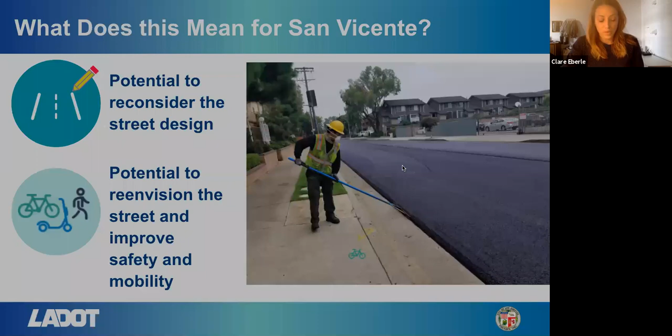The project area spans the corridor from the intersection of Fairfax and Olympic to La Brea. It's about 1.2 miles and connects and covers multiple neighborhoods, multiple residential pockets, and several commercial hubs along the way. It is heavily residential, so a lot of homes, many apartment buildings, and communities, but also full of community destinations, organizations, schools, and so forth.

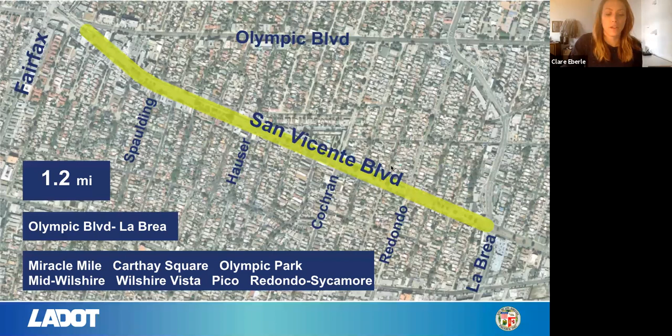We're interested in who's in the neighborhood and who may be using San Vicente and how. So within a half mile of the project corridor, 34% of residents are under 30, 19% of residents are students, 9% of households do not have their own vehicle available and are using other modes to get around. And 20% of people get to work by modes other than single occupancy vehicles. So that would include carpooling, transit, walking, biking, and other modes like motorcycle or rideshare.

So we know that people are getting around in different ways other than just vehicles, and some people who live in the area don't have access to a vehicle at all. This might not mean that they're necessarily biking everywhere, but it does mean that there's some other demands and interest in using the street in different ways.

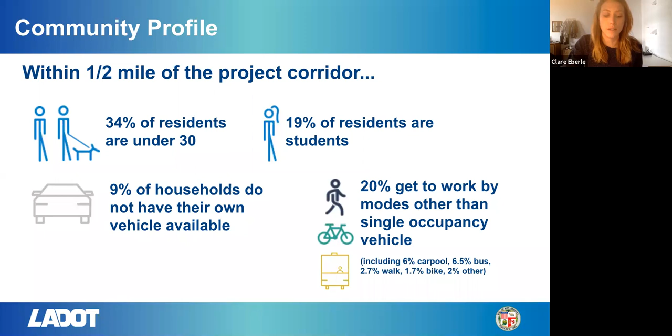So this is also a really exciting, vibrant neighborhood, and I'm sure if you're here today, you know it better than I do, but it's full of great places. A number of community groups are already doing the work of building place and community on streets around the project area. This is a great opportunity to connect to community assets and destinations that really fill the neighborhood.

And snapshotted here are some of those key community places. So Destination Pico, Little Ethiopia, and Destination Fairfax. The community streets that have been made into slow streets during COVID. And another really important change to the landscape is the future Purple Line stations at La Cienega, Fairfax, and La Brea.

There are also many schools, places of worship, and local organizations. So we're thinking about the presence of kids, families, and seniors and others moving around the neighborhood. And we've heard from a lot of people that they generally have an interest in creating a safer neighborhood because in part they may be taking their kids to school or may be interested in walking to some of these places that they go every day or every weekend.

In terms of the mobility context for San Vicente, what resources are here and what assets are here in terms of transportation? There's a lot going on, and it's a good time to think about how it can be re-envisioned to better serve everyone. So San Vicente as a corridor has significant connectivity benefits. In addition to connecting neighborhood amenities and assets, it's also part of a network that will help people get to

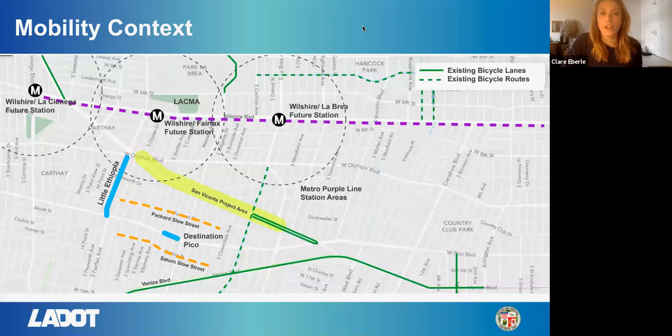So on that note, we're going to switch gears to another survey to ask about how you travel on San Vicente. And there are two questions. How often do you travel here? And what modes of transportation are you usually using? And we'll give it about a minute.

Okay, I'll give it about 5 more seconds on the survey before I close it. And thank you for those participating. It looks like we have definitely more people on our call than are able to participate in the survey, and that's okay. It's great to see a quick snapshot of responses.

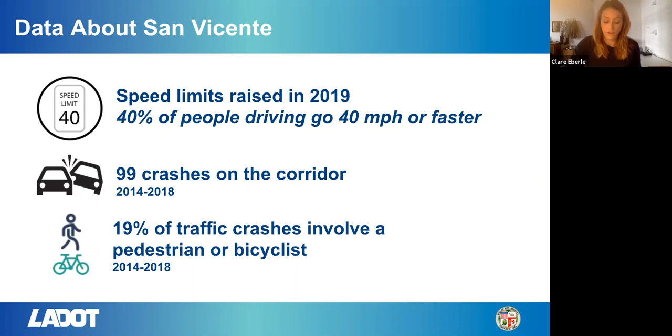So there are some strategies that we can implement to improve those conditions and design for a safer street. Narrowing the roadway or adjusting how wide each lane is increases driver awareness and helps people slow down. We can also dedicate space for people walking, biking, and rolling so that they have their own space that's apart from or separated from vehicles.

We can make crossings shorter for people walking or reduce the number of lanes that are needed to cross to get across the street. Currently, pedestrians need to cross 8 or sometimes even 9 lanes of traffic to get across San Vicente.

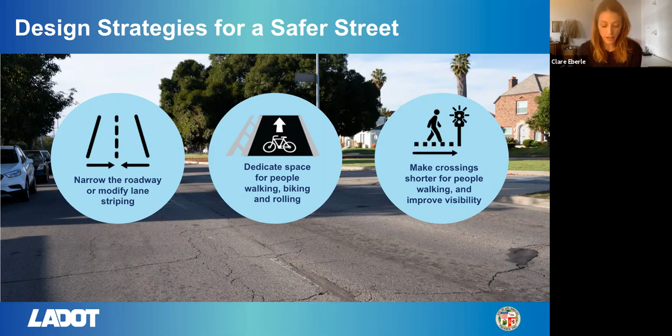So between Olympic to La Brea, the existing street configuration has 2 primary segments, from La Brea to Redondo and then from Redondo to Olympic. A little bit of variation, but these segments really represent the street design throughout the corridor. There are also frontage or secondary roads, but the primary roadway design in these areas is consistent. And this project is not proposing any changes to the frontage roads at this time.

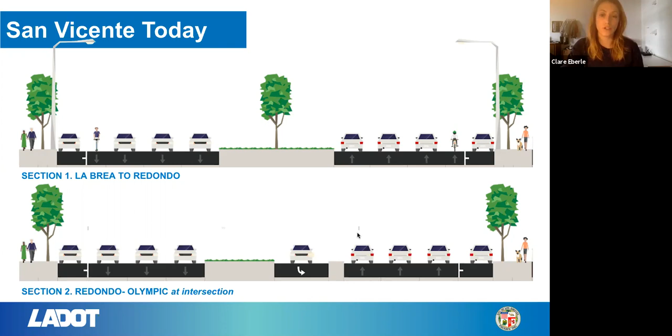So the existing street design from La Brea to Redondo, we have 3 travel lanes in each direction, parking on both sides of San Vicente, and a standard 5-foot bike lane that is striped with paint between the parking lane and the first driving lane.

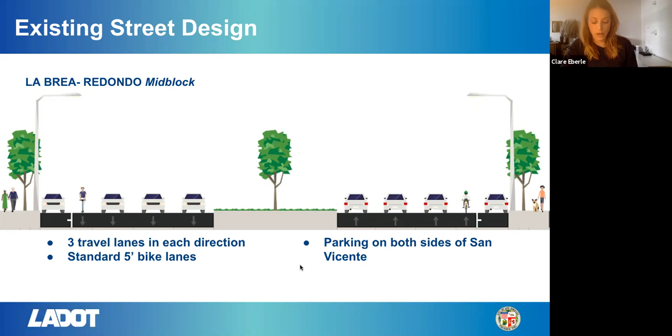From Redondo to Olympic, so going north, the next segment maintains 3 travel lanes, and then there's parking on both sides of the street. But the existing bicycle lanes drop after the road narrows slightly north of Redondo.

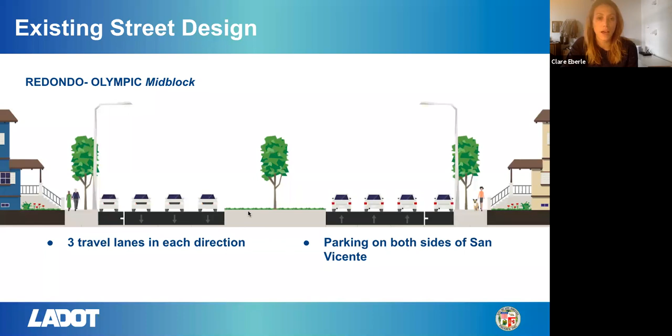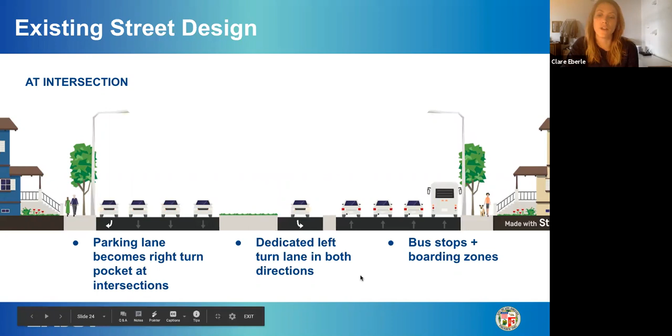At the intersection, the layout changes a little bit where the median lane provides a left turn in each direction. And up against the curb, the parking lane becomes a right turning lane, or in some locations, a bus stop boarding zone. There are actually bus stops on both the near side and the far side on the right-hand side.

So now we're going to move into looking at 2 of the proposed design concepts. The first proposed concept would be to maintain 2 travel lanes, repurpose 1 lane in each direction, and add bicycle or mobility lanes that continue north of Redondo to Olympic and include a striped safety buffer.

This design would maintain parking and 2 lanes of traffic and all turn pockets. It adds that striped buffer, which is a safety feature, and also would provide the traffic calming benefit of reconfiguring one of the travel lanes.

So a second proposed design concept would be to maintain 2 vehicle lanes in each direction, move vehicle traffic away from the curb, and create curbside space for people biking or rolling, or scootering or skateboarding, and add a vertical barrier in between the parked vehicles and the curbside lane.

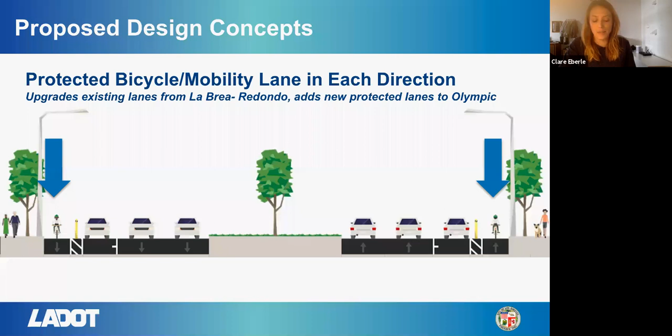So the second design concept that moves cars away from the curb and adds space there is illustrated here. You can see how from the driver's point of view, the roadway feels and appears narrower. There are parked vehicles on the right, and traffic is moved away from the sidewalk and people's homes.

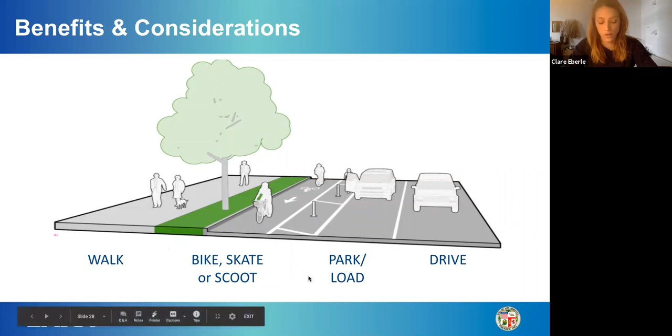So I'm going to spend a couple minutes talking about the benefits and considerations and potential trade-offs related to the design concepts. The proposed street design benefits more than just people using the mobility lane, and that's a really important takeaway that has seemed to come up in a lot of conversations, that there are benefits here that people who may not be bike riding are also looking for and interested in.

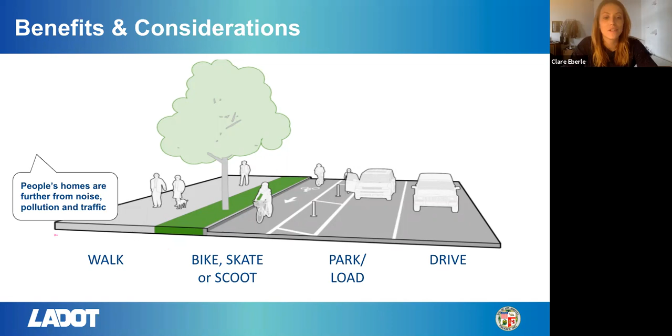Overall, the street can become a more comfortable place. People's homes are further from noise, pollution, and traffic. Pedestrians benefit from a slower street, fewer lanes to cross, and are further from moving vehicles. People on bikes, skateboards, and scooters are physically separated from moving vehicles.

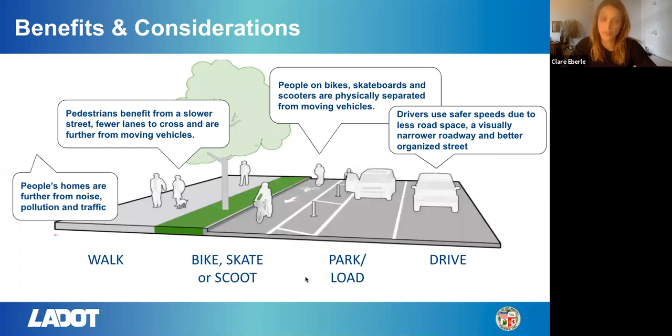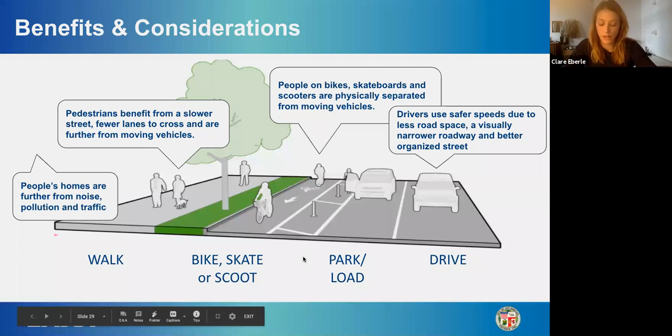Drivers use safer speeds due to less road space. They're more aware, and they have a better organized street. The safety benefits are also significant. So protected bike lanes reduce crashes between bikes and cars by 94%.

The separated space appeals more to new and less confident riders, families, and women. A more comfortable street draws people, making better use of public space and creating a livelier corridor.

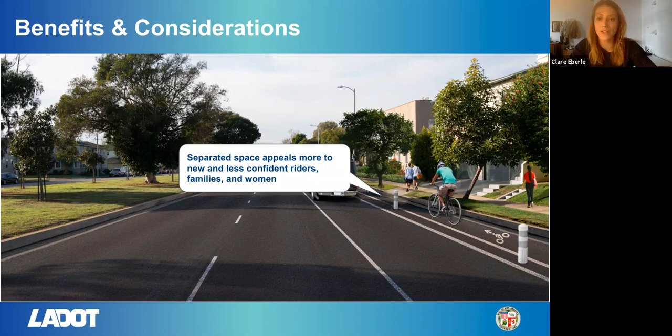And also, as we've mentioned a couple of times earlier in the presentation, construction here is limited to paint and plastic posts or bollards. So it's really cost effective, and it's also adjustable with future plans or changes to the street that may be coming online with other projects, and gives us flexibility to upgrade or make future improvements.

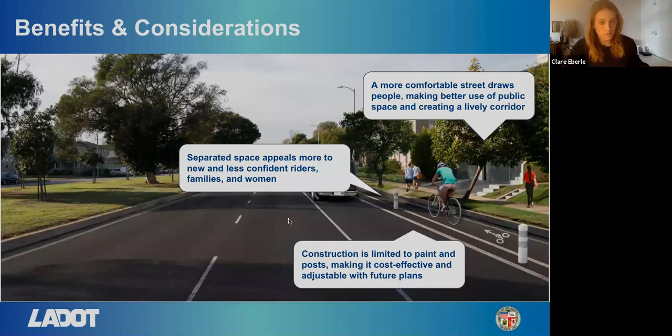So there are some considerations, and one of those is changes to parking. When we install a protected bicycle lane, we also have to introduce some new red curb to ensure visibility of both drivers and people using the bike lane. So we pull back some of the parking from driveways and corners and introduce that red curb to make sure that everyone can see each other and we have maximum visibility.

This allows drivers to more safely enter driveways and cross streets, and people using the bicycle lane to see those vehicles coming. So we are trying to better understand what the parking needs and demands are on San Vicente. Right now, there are approximately 200 parking spaces on the entire corridor that this project falls on. We won't know a precise number of how many would be removed until we get further into the design process, but we typically estimate approximately 25% of parking spaces may be removed for this type of design.

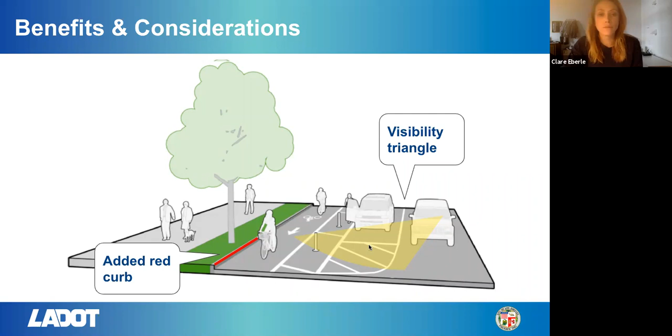So help us learn more about parking on San Vicente. We have another survey with a couple questions. And those questions are, how often do you park on San Vicente, and do you consider parking in high demand? Great, and we'll give about 10 more seconds. All right, and I'll share the results.

So of our respondents, 1 person parks on San Vicente every day. 4 people park there rarely. 1 person considers parking to be in high demand, and 4 people consider it not to be in high demand. So we have heard from a lot of community members that parking can be in high demand on San Vicente, and I'm sure it depends in part on how often you're parking there yourself, and what your experience is. So thank you for sharing feedback on those questions.

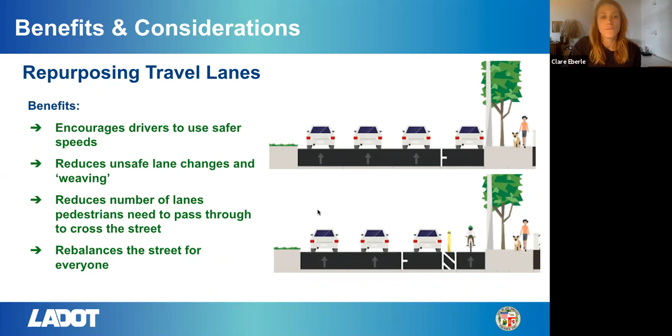So what about traffic? Traffic volumes on San Vicente support that reconfiguration is feasible. Based on recorded data, we believe the number of vehicles traveling on San Vicente each day can be reallocated to 2 lanes instead of 3 without major travel delays. LADOT is continuing to collect data and confirm the projected impacts, and this information will be shared during the project

outreach process. We also know, of course, as mentioned, that the speed limit was raised on San Vicente, and that indicates that speeds are trending up. And that really validates that there are periods of time throughout much of the day, maybe really most of the day, where there's enough traffic that's allowing people to move at 40 miles per hour or more.

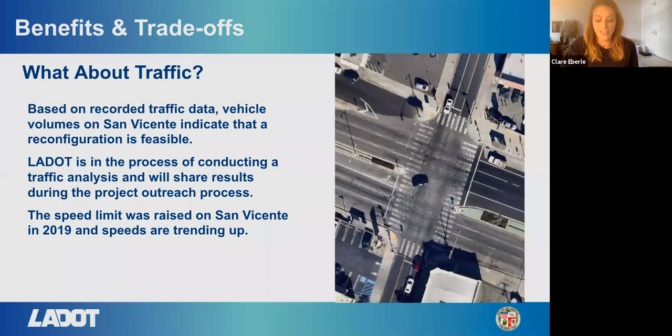So let us know what you think about travel time and the benefits and trade-offs we've talked about. Would you be willing to add time to your driving trips on San Vicente if it meant a safer, more connected street? And would you consider replacing car trips with trips walking, rolling, or biking if San Vicente felt slower and more comfortable to travel on? And I'm going to launch that poll. And we'll give that one about 45 seconds to a minute.

Okay, I'll give it about 10 more seconds. And again, those questions are, would you be willing to add time to your driving trips if it meant a safer street on San Vicente? And for short trips that you normally take by driving, would you consider walking, bicycling, or transit if the street felt slower and more comfortable? Okay.

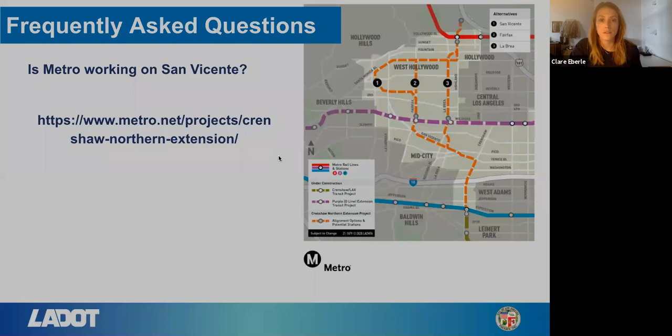So another frequently asked question is, will this project involve the asterisk, or the intersection of Fairfax, Olympic, and San Vicente? So this project will connect to the asterisk and provide access to the hub there, but it will not impact that intersection. And we're not proposing changes to the intersection at this time.

We definitely agree with community members that we've heard from, and LADOT recognizes that the asterisk needs a really holistic approach that will assess the intersection for improvements and relieve congestion, and importantly, improve the experience at the ground level for people crossing and navigating through this intersection. There are efforts underway at LADOT and with community stakeholders to determine what improvements are necessary and should be made over time, but more extensive study and outside funding eventually will be needed.

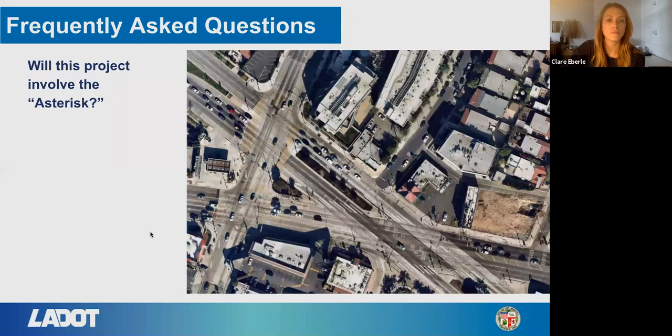You can also email us or leave a voicemail with your comments about the project. And I think I mentioned this, but we're also open to hearing if you have recommendations or are involved in an organization that would like to get more info about the project.

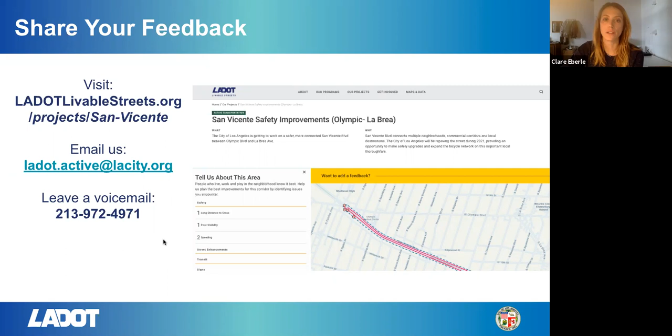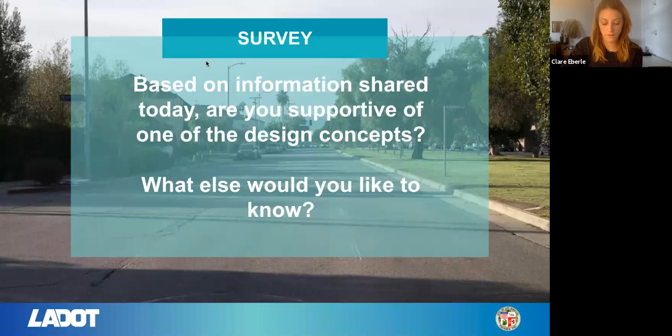And with that, we'll move to questions and answers, or hopefully answers, definitely questions. If there's anything we're not able to answer here today, we'll follow up with you. And again, we'll be compiling questions and answers to publish and circulate.

So, hi, I'm Babak. I've been monitoring the Q&A, and there were 2 questions related to the section of San Vicente just to the west of the project segment, west of Olympic. One was concerned about closing the potential bike lane gap between Olympic and Wilshire Boulevard, because currently there isn't a bike lane there. So that could ease connections to the Purple Line La Cienega station. And a similar question is related to the traffic impact on that portion as well.

Yeah, that's a great question, and we have heard that question a lot. This project, or the work that we're proposing to undertake now, doesn't fully close the gap from Redondo all the way to Wilshire. We could in the future consider installing similar improvements, or basically extending the improvements north of Olympic to Wilshire.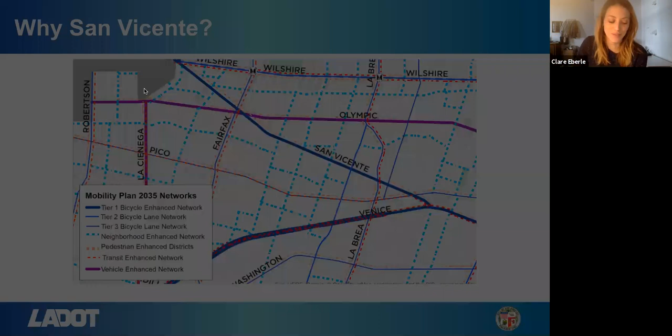And actually, there we go. I anticipated this may come up, and this is a map of the mobility plan in this area. Prior to adoption, San Vicente was studied along with the rest of the surrounding street network to understand the role every street has in the network, and which streets are most appropriate to prioritize improvements for to support the needs over time with different types of improvements. So including for transit, for vehicles, for pedestrians.

We do also have the transit enhanced network and pedestrian enhanced districts, and even a goods movement network. So San Vicente is on the Tier 1 bicycle enhanced network. This means it is a top priority street based on analysis and community outreach that was conducted at the time of the plan for the highest quality bicycle enhancements and active transportation, multimodal enhancements. And it really does have a unique network role.